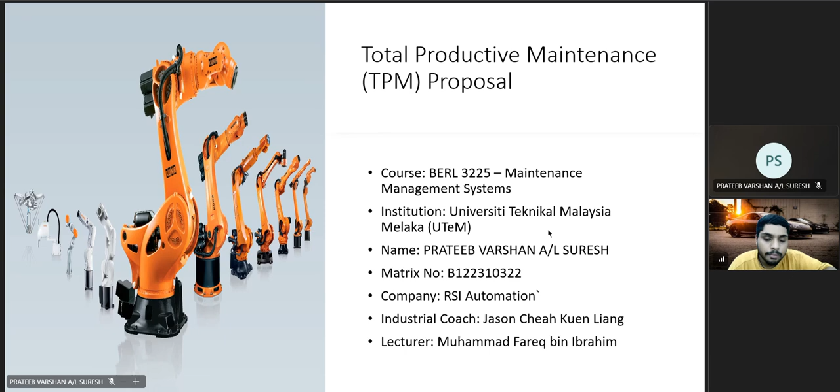Firstly, I would like to introduce you to TPM. So what is TPM? You might be having the question. The definition of TPM is a maintenance strategy that aims to maximize equipment effectiveness through proactive and preventive maintenance activities involving all employees. So what are the key benefits of TPM?

The first benefit of TPM is it reduces equipment breakdowns, improves productivity, and increases workplace safety. Next, it enhances product quality. And lastly, it involves all employees in maintenance. So basically, TPM is a maintenance that we do each week or each month to make our product, our robots, or our environment clean and safe for all the employees that work there.

So that's it. We have actually the TPM pillars framework. There are 8 pillars which I categorize by two, where one and two are in one pillar, three and four in one pillar. So let me explain that.

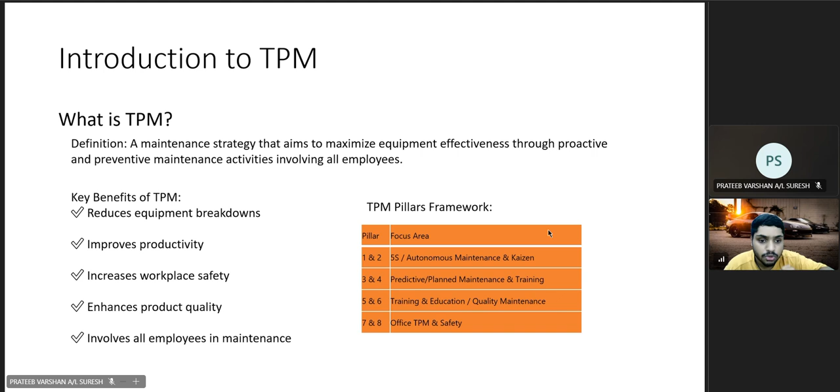Pillar one and two, the focus area is 5S, autonomous maintenance, and Kaizen. So pillar one is 5S and autonomous maintenance, and pillar two is Kaizen. Next is pillar three and four, predictive and planned maintenance and training. Pillar five and six are training, education, and quality maintenance. Pillar seven and eight is office TPM and safety. So those are the pillars, and I would like to continue.

Before we talk about the maintenance, I would love to talk about the company background that I'm working at right now as an intern, which is RSI Automation in Seri Iskandar. The company profile is a Malaysian industrial automation company. That is the company type.

RSI Automation specializes in robotics integration, machine vision systems, and PLC programming. RSI also focuses on Industry 4.0 solutions. So these are the core services in RSI Automation.

Firstly, we are going to talk about the service area, and then I give you a description for that. The first service area is robot system integration, with the description being automated production lines. Second is machine vision, with the description being quality inspection system. The third is control panel, where the description is industrial automation hardware. Lastly is software and solution, which is smart factory technologies.

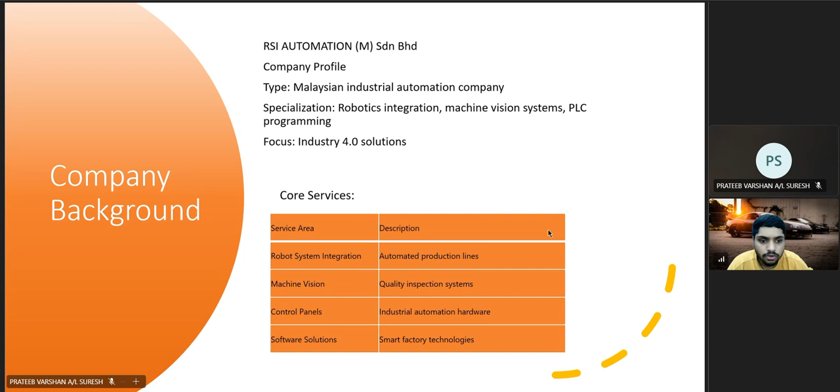Next, this is the TPM implementation overview. There are actually 5 steps of the TPM implementation plan, which I will tell you about, each step and the focus area of TPM below. So the first step is 5S and autonomous maintenance.

The activity that we do here in RSI for this pillar is initial equipment clean and inspection. The second step is Kaizen. The activity we do here is tackle root cause for further maintenance.

The third TPM pillar is predictive and planned maintenance. The activity there is scheduled maintenance checks. The fourth step is safety and training. This activity is employee development.

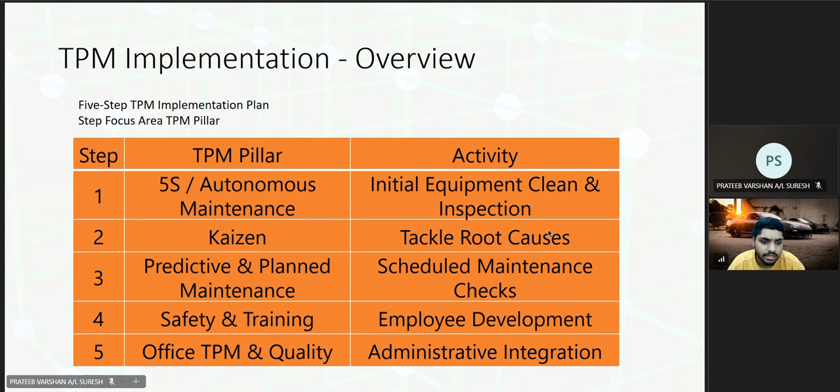The fifth step is office TPM and quality. The activity there is administrative integration. So next, I am going to talk about each step in more descriptive detail.

The first step is initial equipment clean and inspection. This is for the pillar 5S and autonomous maintenance. So you might have three questions in mind: who, what, and how. Basically, who is doing this equipment clean and inspection? The operators are doing this equipment clean and inspection, either every day or every month.

So what they're doing is clean and inspect robots and conveyors. Basically robots in the industry work on conveyors for better movement, so both need to be checked and inspected. So how are they doing it?

Basically with a digital 5S checklist via QR code. After they're done with the checklist, they send it via QR code to inspect. The benefit of this implementation strategy is real-time data collection - everyone gets the collection in real time, easy access for operators, standardized inspection process, and immediate recording of findings. Those are the benefits.

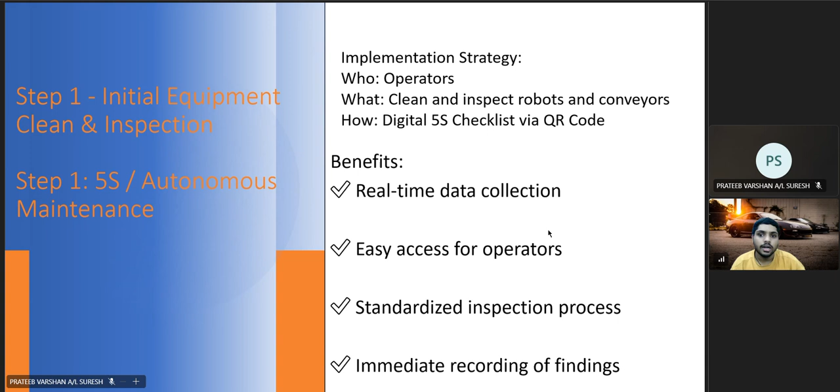Next we'll talk about step two: tackle root causes. This is for the Kaizen and continuous improvement pillar. I'll point out the 1 Point Lesson OPL system. We have an A4 sheet documentation for tackling root causes. The components in the A4 sheet are photo, the root cause itself, and the countermeasures.

First, the photo is for visual evidence of the problem, so everyone knows what the problem is and what to do about it. Next, the root cause is for identification of the underlying issue - we have to identify what the issue is in order to give a solution. Third, as I said, is the countermeasure, where we find a solution for implementation to fix the issue.

We also have a priority level for tackling root causes, categorized into three levels: high, medium, and low. When the issue is high priority, immediate attention is required - we need to get to the solution for that issue right away.

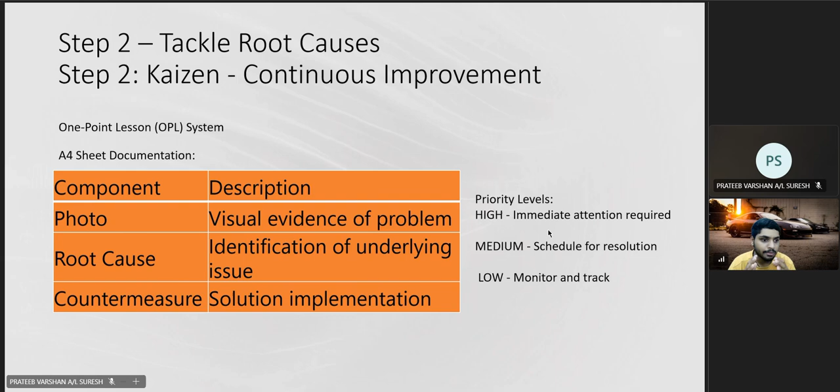When it's medium priority, we schedule when we can fix the issue, maybe next week or in 2 more days, something like that. When the priority is low, we monitor first to see if the issue is getting more problematic, and track it. If it reaches a point where it's more problematic, we get into the fixing process. That's it for step two.

Next is step three, predictive and planned maintenance - from reactive to proactive maintenance. We have it laid out in a table here, described by frequency: daily, weekly, monthly, and hour-based.

The daily activity example is basic inspection, where operators check the robots and robot arms daily, so they move better and don't cause problems during production. Weekly is more or less the same - a routine check for any problems that might occur in a week.

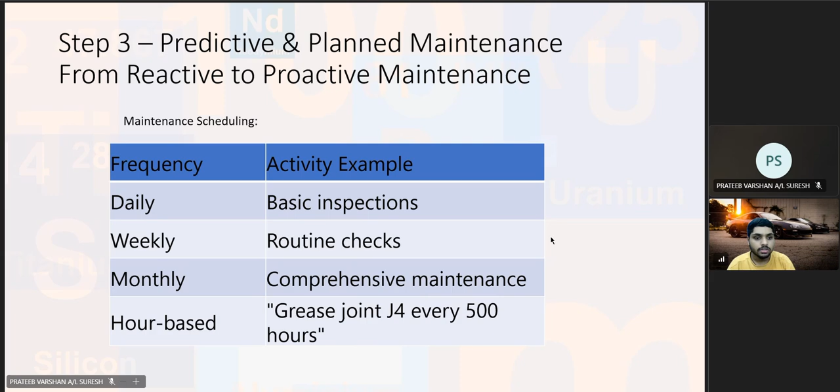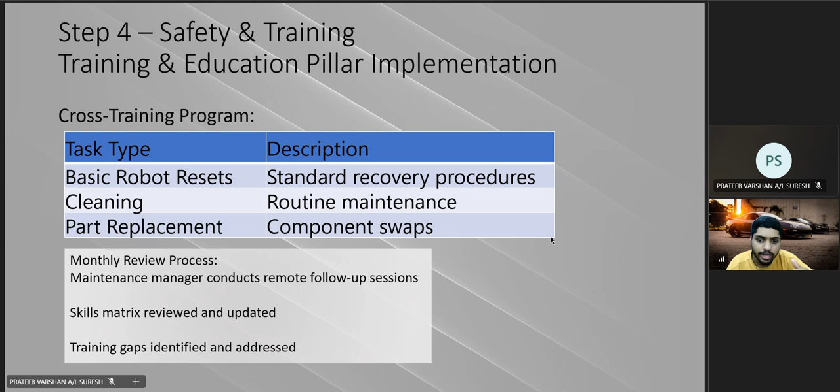First, a robot gripper is misaligned with the robot, which causes scratched part quality defects. So what we do is find another gripper online, or basically find a new one, take a picture, and send it to the operator.

Next, the maintenance action is documented. We record what happened with the gripper into our Excel or A4 sheet, then root cause analysis is initiated. We document the cause of the gripper getting misaligned, analyze the problem, and document it.

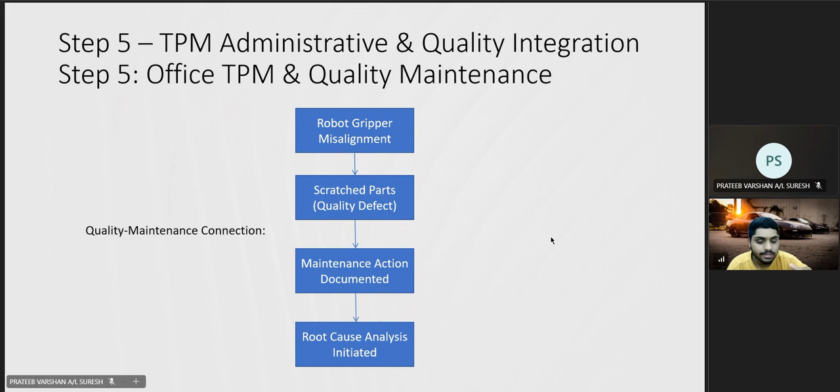Next is improvement of maintenance management documentation. The current management documentation is not good, so I'd like to suggest some improvements, such as a digital TPM documentation system.

The problem with the traditional paper-based record system is that we have three issues I'd like to address. The first is difficult data retrieval, which results in wasted time searching for records, since operators have to search for each record, taking time.

The next issue is delayed reporting. Since data retrieval is difficult, decision-making also takes a long time. The last issue is inconsistent record keeping, making the process slower and less effective due to slow decision-making and waiting time for records.

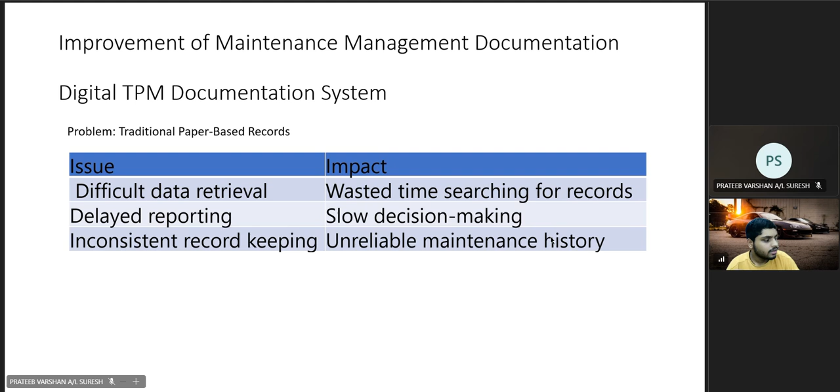Unreliable maintenance history ends up all over the place. So next, I would like to suggest two integrated modules to implement for maintenance.

There are two modules of the digital TPM system. One is spare parts inventory, with three features: stock quantities and minimum levels, which benefit by preventing shortage of components or parts; supplier details for quick reordering; and automatic notification, so when a part is low in stock, we get alerted and know when to restock.

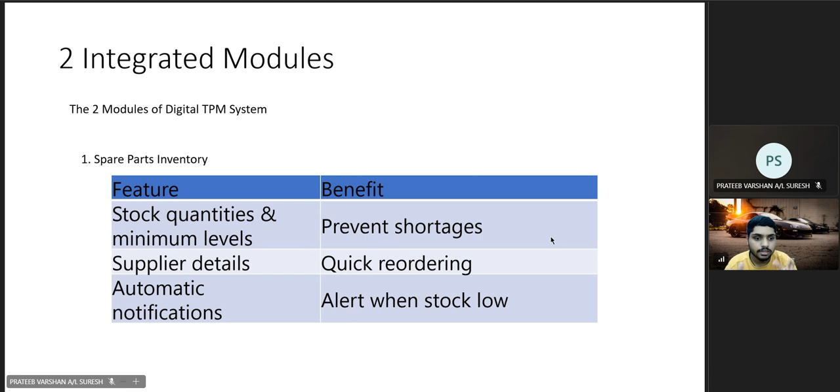The second and last module is work order management. Its components are fault description, priority and technician, repair action, and completion status. The function of fault description is to document what the problem is.

Priority and technician's function is assignment tracking, so we can assign each operator their task more effectively. Repair action is documentation of fixes, so all fixes we do are documented and kept safe for future reference. The last, completion status, lets us monitor the progress of all maintenance done by the operators.

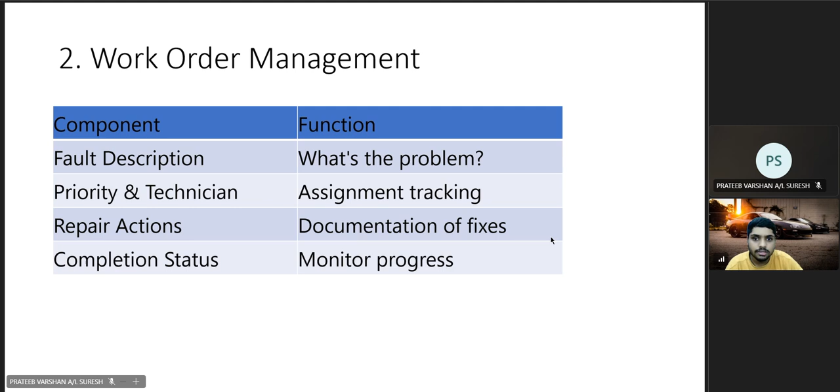In conclusion, I have a summary and recommendation where the achievements are: low cost TPM implementation, professional grade maintenance tracking, full coverage of all 8 TPM pillars, and integration of maintenance with quality management.